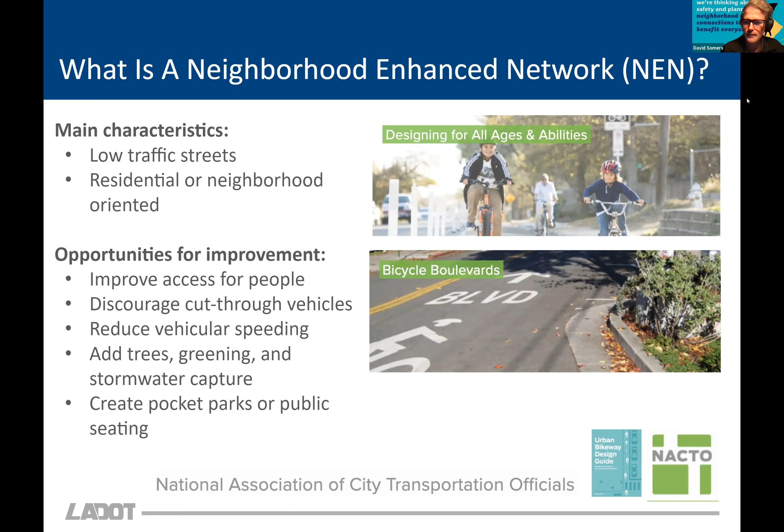Now, to get to know our attendees a little better, we're going to administer a quick poll. The question is, how comfortable are you riding a bicycle to get to places? The range of options there is: bicycling is not for me, not interested; I would like to bike but I have concerns; I ride a bicycle but only where and when I feel safe; and I ride my bicycle without fear anywhere and everywhere. So just give that a minute for those on the call to complete.

All right, we will share results. The results are that most folks on the call ride a bike, but only where and when they feel safe. At least one respondent said, I ride my bicycle everywhere without fear, which is pretty interesting. It's good to know where those on the call are on the spectrum of bicycle riding comfort, especially in Los Angeles, where we have high traffic urban streets.

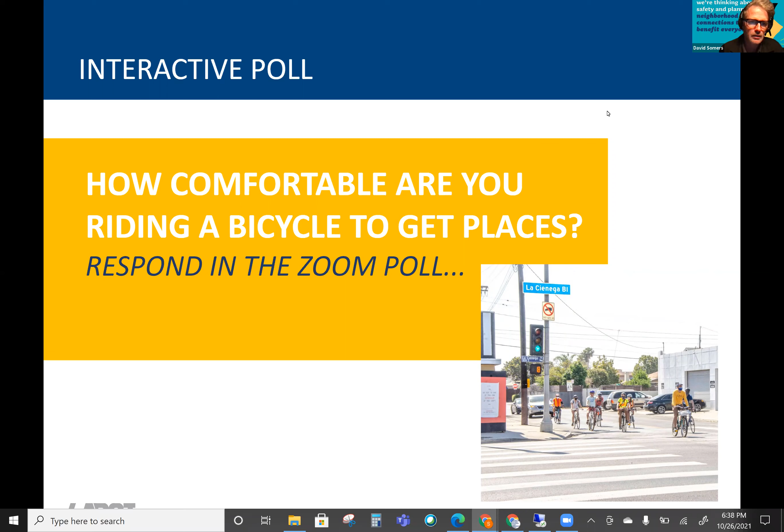And just to ground this result into a larger perspective, a national survey of 3,000 people from 50 large metro areas suggests that over 50% of the population would like to bike more but have some reservations. This is what we typically call the interested but concerned category of folks who would want to bike, but the conditions aren't available to feel comfortable doing so. People regularly say that travel stress, the experience of riding with traffic, is a major concern in choosing to bike.

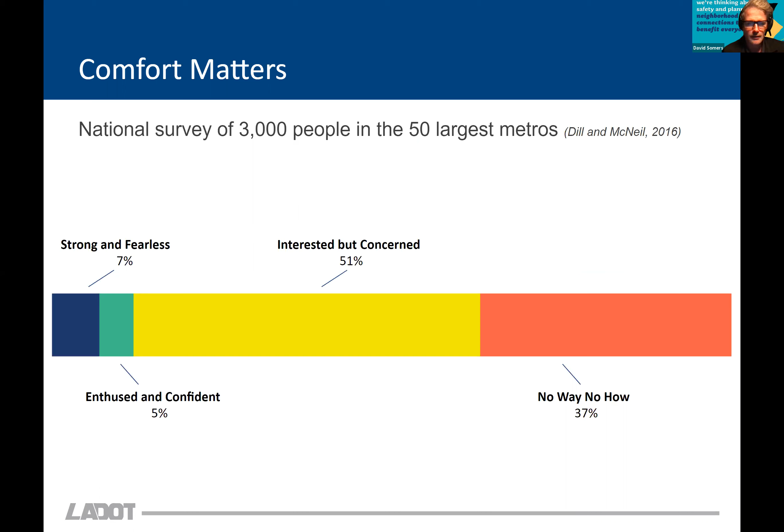And in an LADOT survey of over 800 people, we found that 88% of respondents agreed with the statement that they would like to bike more if it were safe, pleasant, and convenient. So this is really the grounding under which we understand the exercises that we undertake in terms of understanding travel stress and how far we need to go in order to make it more comfortable.

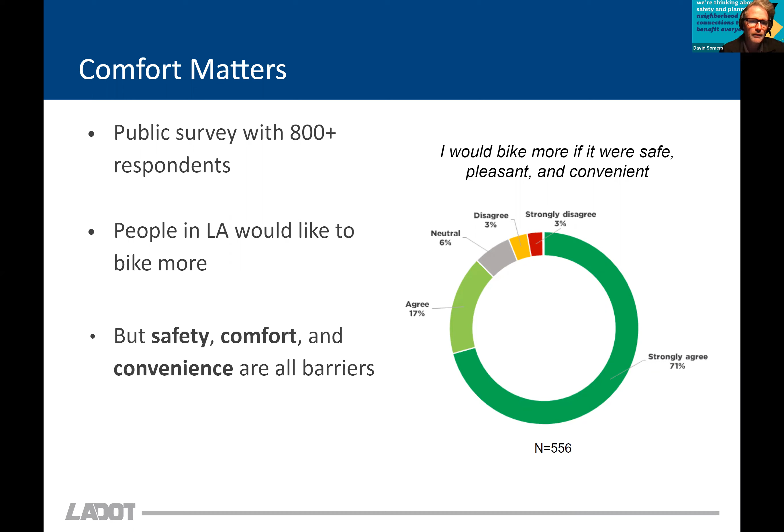If we go to the next slide. If we're to achieve the mobility plan goals of better access for Angelenos and fulfill LA's climate goals of the city's Green New Deal, we will need to expand opportunities for people of all ages to make trips by biking and walking. We can achieve this goal by reducing travel stress.

LADOT measured travel stress on our neighborhood network through criteria like traffic and speeding, and how safe or unsafe people feel when crossing major streets.

Our assessment found that the main challenge is intersections, where neighborhood streets cross larger major streets. There's a lack of traffic signals to help people cross major streets on foot or on bike. You could see this where the intersections have red circles scored as high travel stress, where there are no formal crosswalks or signals.

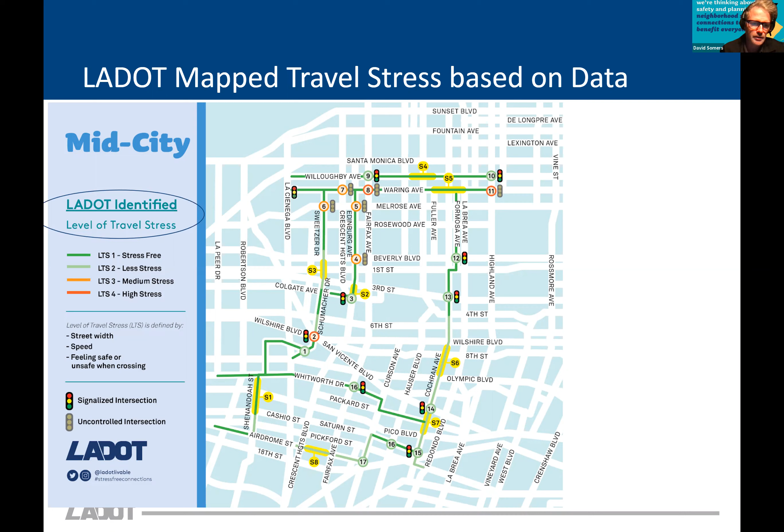So this is essentially us understanding travel stress on our neighborhood network and what we need to do in order to make continual corridors that are safe and comfortable from origin to destination for folks, especially here that we're focused in mid-city. So the next slide is that.

So what you were seeing is LADOT's data-driven approach on the previous slide, where we compiled the data about traffic and speeding and the conditions at an intersection. To validate our data, we recruited participants to help share their travel stress levels with us.

Some of you participated in this, and your assessment largely agreed with our findings that intersections that lack crossings were key barriers. You also selected a few street segments as having higher travel stress due to traffic or speeding or other conditions that made it uncomfortable to ride amongst traffic. This indicates to us that we need more traffic calming at these streets to be comfortable for all abilities.

LADOT is very grateful to those individuals and organizations that helped validate our analysis and have a better understanding of travel stress barriers. I would indicate that there was one intersection that we also focused on that was a little off our network, but one of our participants identified having specific challenges crossing the street and accessing transit there in Little Ethiopia.

And so we wanted to acknowledge that as well as part of the feedback, which was valuable to us. And we are looking into how to address those concerns with some of our other programs at LADOT.

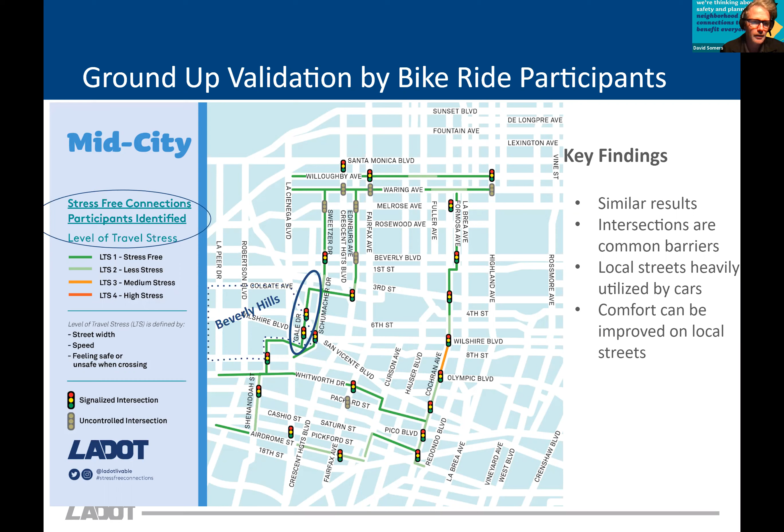So that's just to say that the feedback we've received from this exercise is already resulting in real changes, and we look forward to making more of those as we get further into our planning process. So the next slide - now that we've identified barriers, the next step is to look at design solutions.

And I will now pass it over to Severin to talk through what are some of the tools that we have available to us to address the barriers to travel stress.

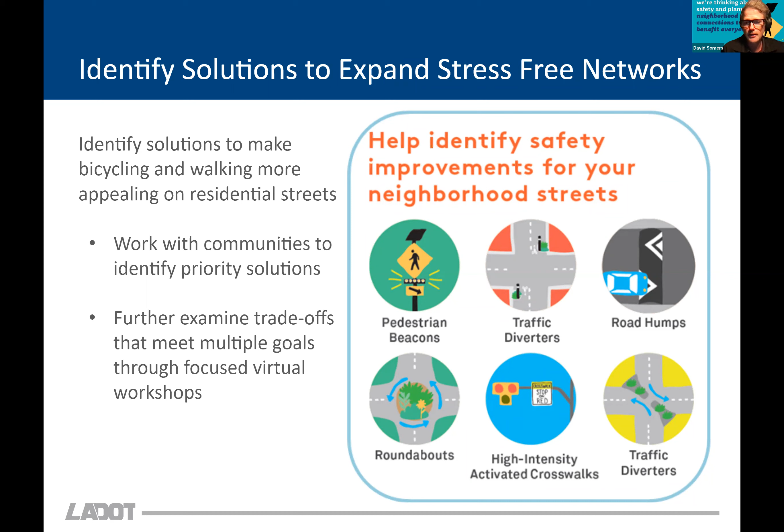So we want to take our technical data and the user feedback that we've acquired so far, and use this feedback to identify tools that we can use to create these low stress neighborhood corridors. Some of these tools you might be familiar with, but others perhaps not so much. So I'll quickly run through some of the things we're considering currently at the moment, so you have a better idea of what we mean when we say we want to build out low stress neighborhood corridors.

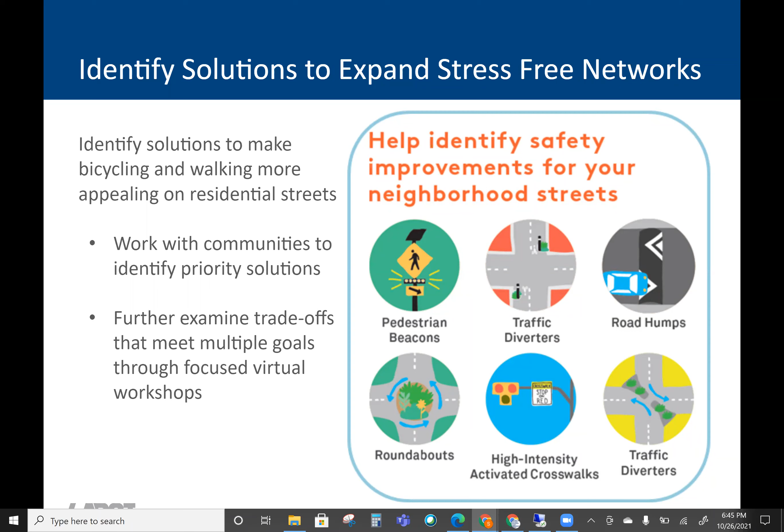Perhaps one of the most obvious tools in the toolbox is the speed hump. Essentially it's raised pavement in the middle of a street on a residential street, used to slow traffic down. Sometimes it can be combined with crossing opportunities so that cars slow down when somebody's crossing at a designated crossing. This is a fairly familiar tool that we see throughout the city on neighborhood streets.

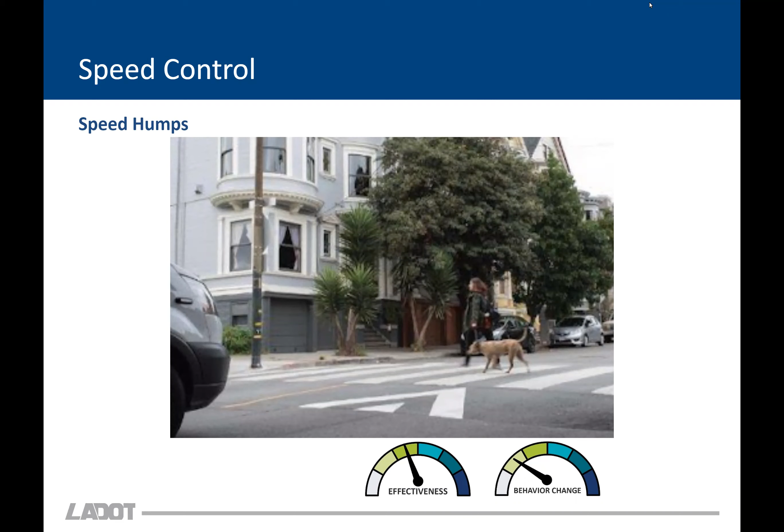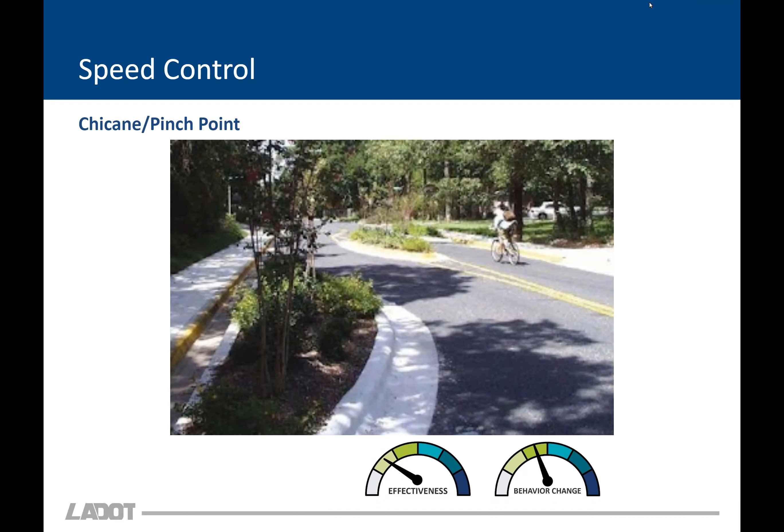There's something called chicanes, and as shown in the visual, it's landscaping and hard elements that force traffic to actively navigate around these elements so that they're more aware of their surroundings and not just coasting on autopilot driving down a straight street. It does require a bit more attention, so you can't be fiddling with your phone. This serves to slow down traffic and offers opportunities to incorporate some modest landscaping.

Then there's curb extensions. We also see this a fair amount in the city. This shortens the pedestrian crossing at intersections, and requires traffic to slow down as they navigate turns, particularly right turns and left turns. But as far as their effectiveness in slowing down traffic on a straightaway, it may not be as effective as some of these other tools.

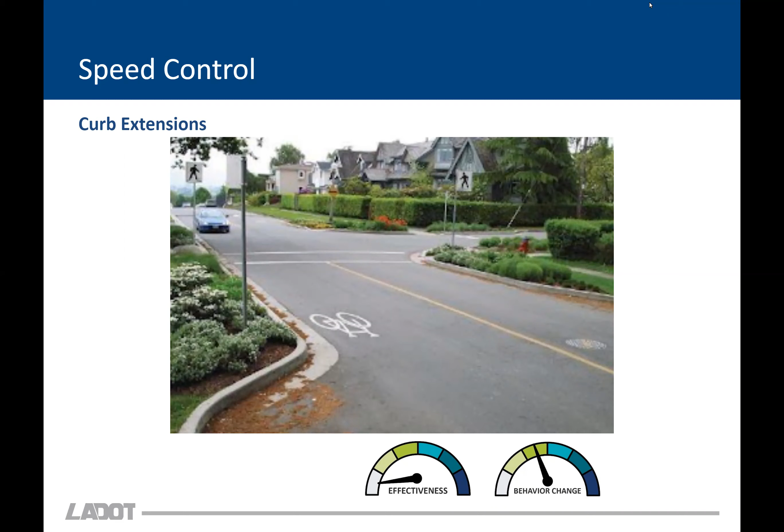There's traffic circles. We are starting to see these crop up around the city, and essentially this forces traffic to navigate in a counterclockwise motion around the intersection whether they want to make a right turn, a left turn, or just go straight ahead. This eliminates conflicts between different directions, so you're less likely to have head-on collisions or T-bones where two opposite streams meet, because everybody is navigating around a common space. The opportunities for conflict are minimized, and it raises the awareness of everybody traveling so that you're actively looking and navigating space visually.

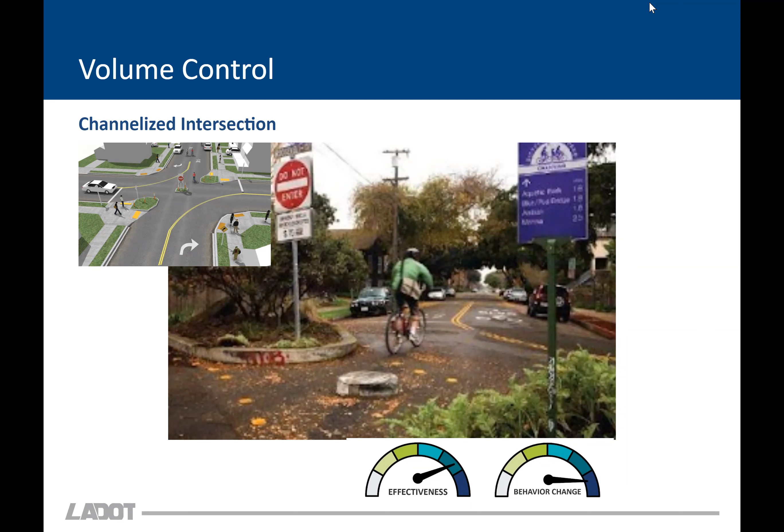There's something we're calling channelized intersections. What this does is require traffic to turn in just a single uniform direction, though it does maintain through access for people walking and biking, as well as emergency vehicles. This is a tool that can be strategically placed so that traffic doesn't immediately come in from a major street and use a residential street as a cut-through corridor, but instead routes traffic back onto a main street.

There's another tool called a median island, and what this does is limit through movement, but it still allows traffic to turn right in and right out of a residential street. It also maintains through traffic on the perpendicular street.

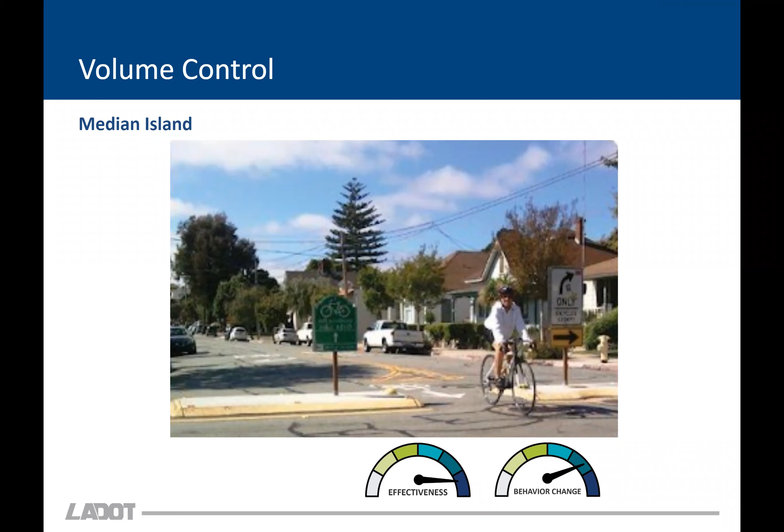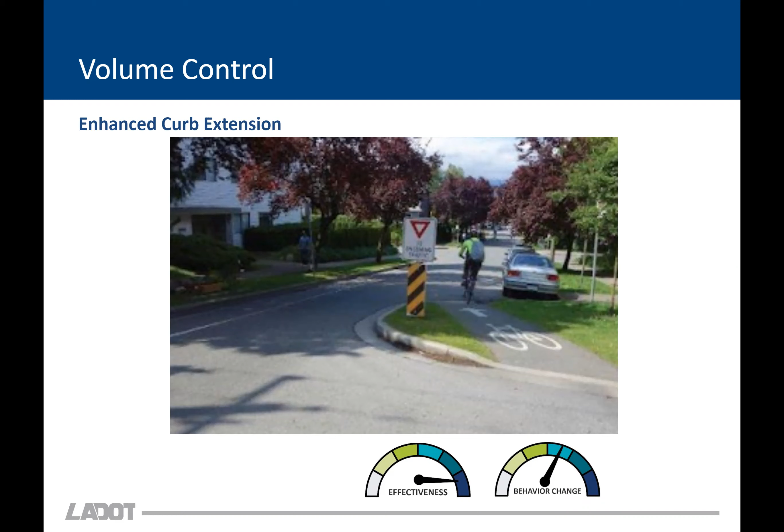There's something called enhanced curb extensions, and this is a curb extension that's much more substantial than your typical 3-foot or 5-foot curb extension that we showed earlier. These extend quite a bit into the roadway and physically limit traffic from entering a residential street. You're still allowed to exit on the street as shown in this visual, or it can be the opposite, only allowing traffic to enter but not to exit. It does maintain through access for walking and biking as well.

For a lot of these measures, like the traffic circles, median islands, or channelized intersections, these are things we can do using temporary materials, striping, plastic bollards and signs as a way of testing the measures to see if they're appropriate or working well, without necessarily committing to an outcome.

This, of course, can be less effective. We sometimes see that doing things with temporary measures has less compliance. People might drive over the plastic bollards or try to navigate around them. But nonetheless, it can be a good starting point as a proof of concept, or to better understand through temporary materials what a final outcome could look like.

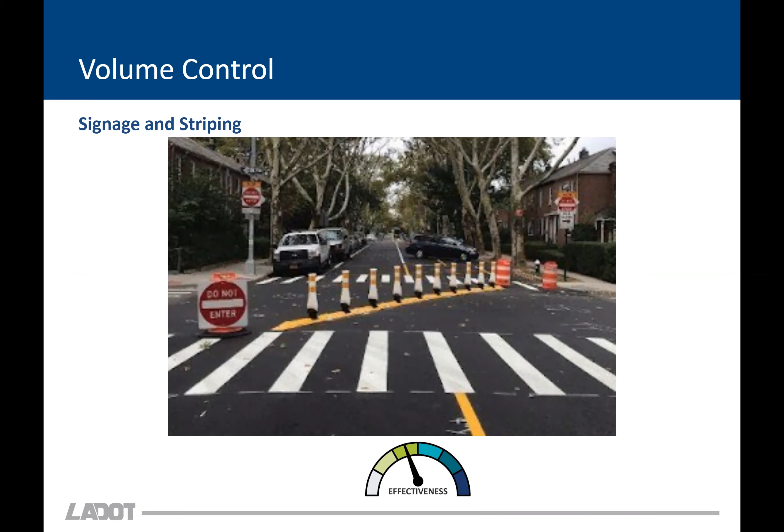There are also things we can do to our existing infrastructure, just modest tweaks to make our neighborhood streets more accessible for walking and biking. What we see here is an existing intersection that is slightly offset. What we can do is tweak the signal phasing so that in phase 1, traffic on the major street has a dedicated light and can turn in any direction they please. Then when they get a red light, we provide a green light to just one of the directions on the local street.

And this is done so that we can have continuous through movement on the local street and not have to worry about oncoming traffic. And then we can do the same for the opposite direction on the local street to facilitate that movement in a seamless motion, so that if you're riding a bicycle, you're not necessarily stranded in the middle when traffic has the green light on the major street. This is a way to separate those movements, and it doesn't require anything new if there's an existing signal. It's just something we can modify for that benefit.

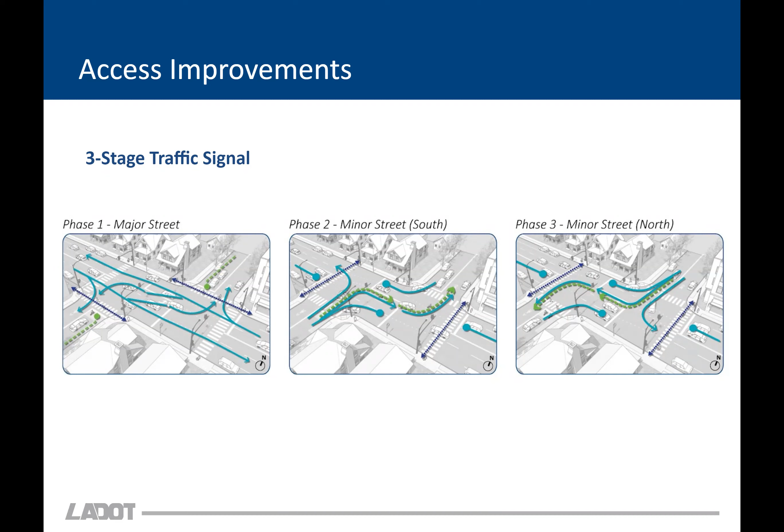And then there's something called a leading pedestrian interval, or sometimes a pedestrian head start. You may have seen these. What this does is provide a green light for people walking a few seconds in advance of vehicle traffic getting a green light. This is beneficial because pedestrians simply move slower than cars. An intersection a car can clear in 3 seconds might take 15 seconds for a pedestrian. By giving pedestrians that head start, they can get into the intersection and become more visible, so a driver turning right isn't suddenly caught off guard by a pedestrian stepping off the curb. By that point, the pedestrian will have already made it several feet into the intersection, and we can avoid these kinds of potential conflicts.

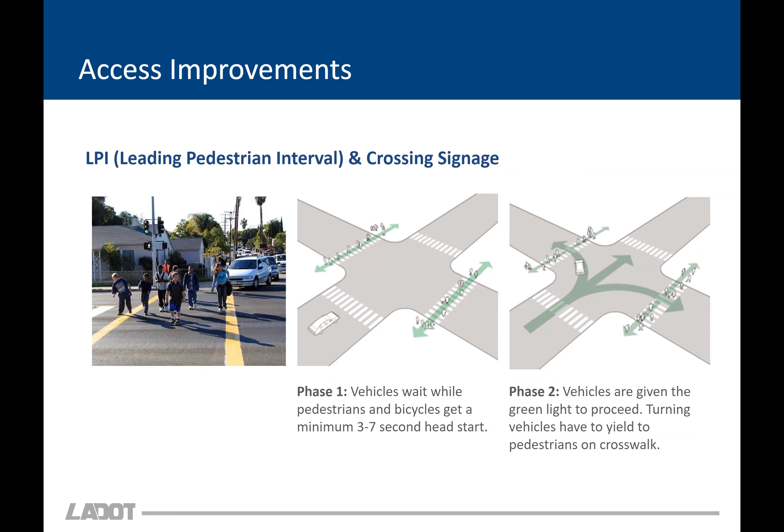So we take all these tools, and that's how we envision building a substantial portion of our stress-free networks. There are going to be some things that require traffic to slow down, and some elements where we may want to reduce the amount of traffic on a residential street, while providing additional accessibility measures to really prioritize sustainable transportation while maintaining local access, but discouraging unnecessary cut-through traffic.

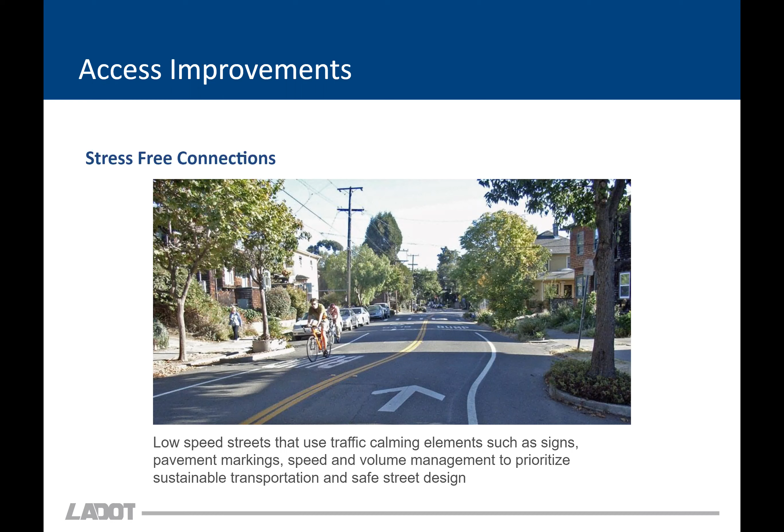All right, and now we have another poll, which we will share with you all. Please select your highest priority for designing neighborhood streets. There are 3 options presented here.

Everybody is taking the poll, and here are the results from the participants. We see that maximizing safety and comfort of people walking and riding bikes is very important, as well as reducing through traffic.

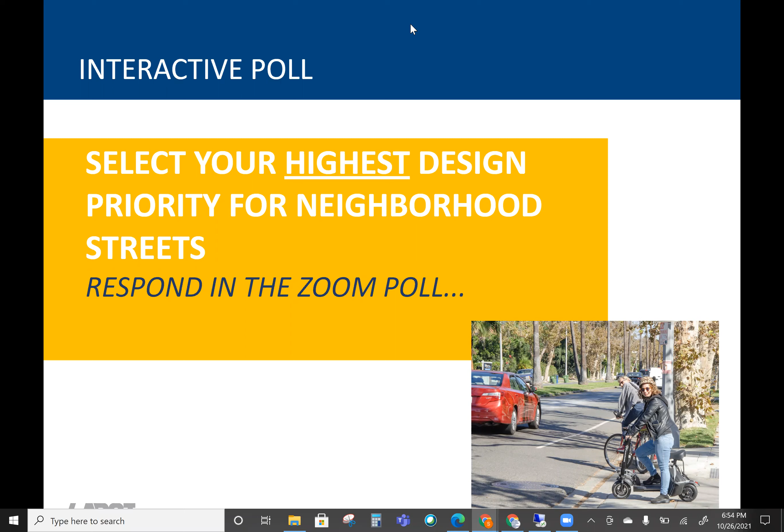Thank you. Now we have another question: please select your second highest priority. So we'll launch that.

All right, so the results are in, and we see that reducing through traffic in concert with maximizing safety for people walking and riding bikes emerge as the top 2 priorities. This is perhaps a good sign, because those are definitely key elements to building out that neighborhood network that is stress-free and really appealing to people of all ages and abilities. Thank you for participating in that.

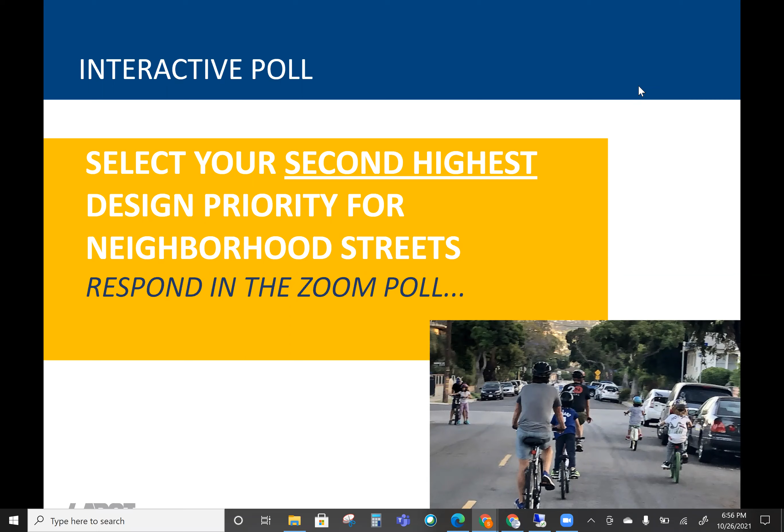So we've talked a little bit about some of the tools used on our residential streets. There is, of course, the issue which David mentioned a bit earlier, which is what we do at major intersections. So with that, I will pass it quickly over to David.

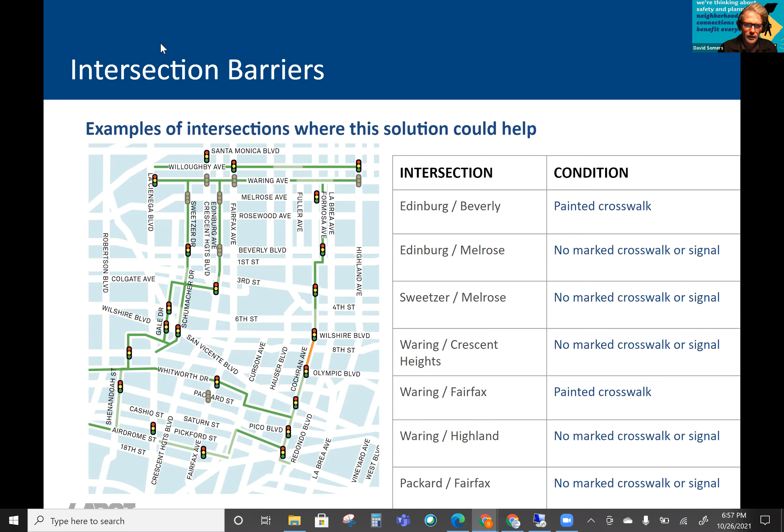These are examples - if you go to the next slide there, Severin - so I think this should be highlighted. Yes, so these are the intersections that we'll be further exploring in our planning process to design solutions that would help solve those gaps in the network and address user comfort and safety when crossing these major arterials. So I'm going to hand it back over to Severin.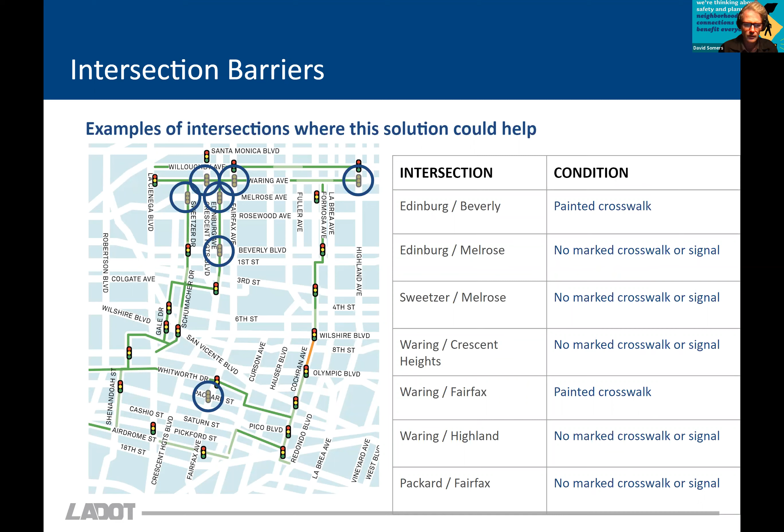To talk about what those types of intersection solutions would need to be in order to address some of those challenges that result in an uncontrolled crossing - where you're biking or walking, you come to a stop sign and there's no clear guidance on how to cross that street. Thank you, David. Yeah, so when it comes to crossing major streets, I think for a long time the only kind of solution we collectively envisioned was installing a traffic signal, right?

That's one way to stop traffic while providing access on the local street. But what we see is that sometimes this can invite more cut-through traffic on residential streets, because if you're driving and you know there's a residential street parallel to this busy street where you can trigger a green light and just proceed, that can be appealing for somebody looking to avoid traffic on a major street. The downside is that this makes the residential street less appealing for more environmentally friendly ways of getting around, where we want to make it appealing.

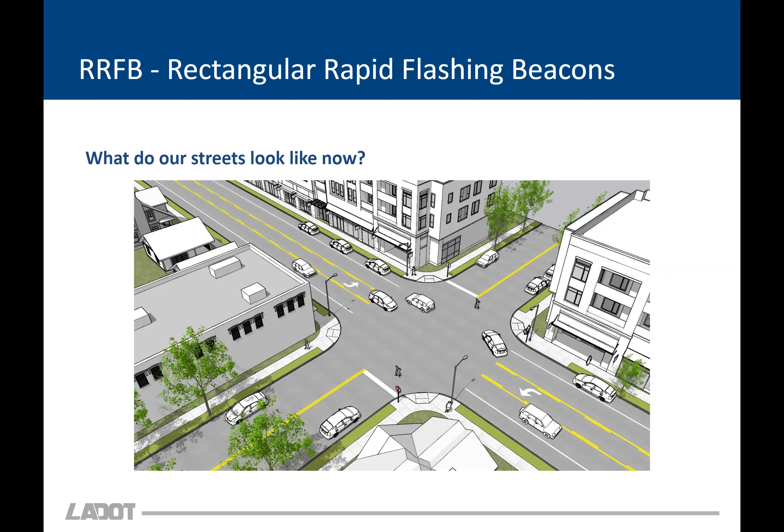One of the tools some of you may be familiar with is called a rectangular rapid flashing beacon, or simply flashing yellow lights, as I hear people refer to them. This provides a button for somebody walking or biking to push that activates flashing yellow lights and lets you get across the major street. This tool is typically used when you only have to cross one lane in each direction. It isn't really advised when you have to cross multiple lanes of traffic, so it has limited application, but here in this diagram is the kind of context where it might be an appropriate tool.

Should there be funding in place, this is always something that can be made more substantial and more aesthetically pleasing, incorporating landscaping, maybe a pedestrian island so that it breaks up the crossing. These aren't necessarily things that come standard with a flashing beacon, but it is something that can be considered.

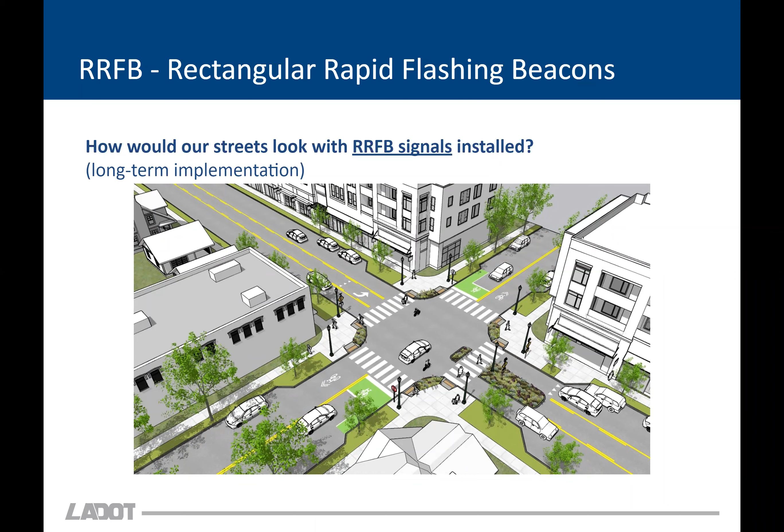But more often, when we need to cross busy streets, they look something like this. You have at least two lanes in each direction, and maybe there's a left turn lane. This can be quite challenging to cross as somebody walking or biking.

Now, this is a fairly new tool in the toolbox, but something we are looking to consider is called a pedestrian hybrid beacon. It effectively functions like a super stop sign. You push a button as somebody walking or biking, and it triggers a red light for traffic on the major street. This is different from a traditional traffic signal because it does not trigger a green light on that local street. So if you're on the local street driving, you're going to have a stop sign just as in the existing conditions. If you're looking to use this local street as your convenient cut-through, that isn't going to help you, because traffic is not going to be required to stop for you under any circumstance.

And then we see here what this can look like, again, if we have the resources and funding in place to make this more of a complete project.

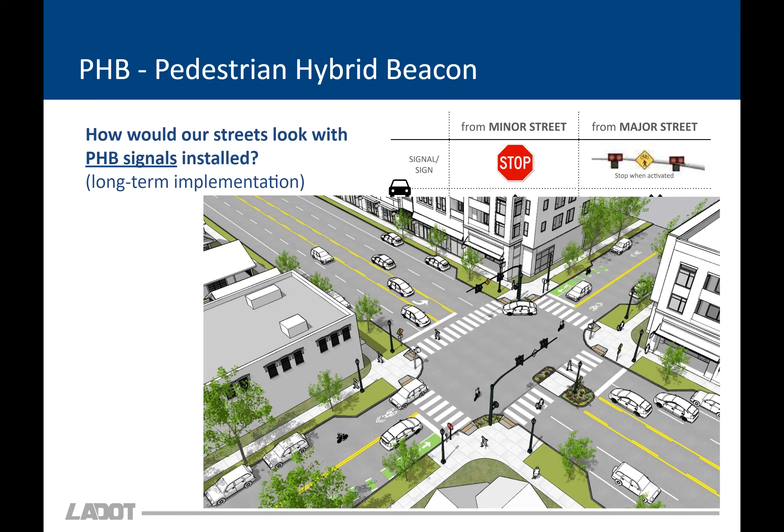And those aren't the only tools. We also have something called the Toucan, and this refers to the fact that two modes of travel can cross: people walking and biking.

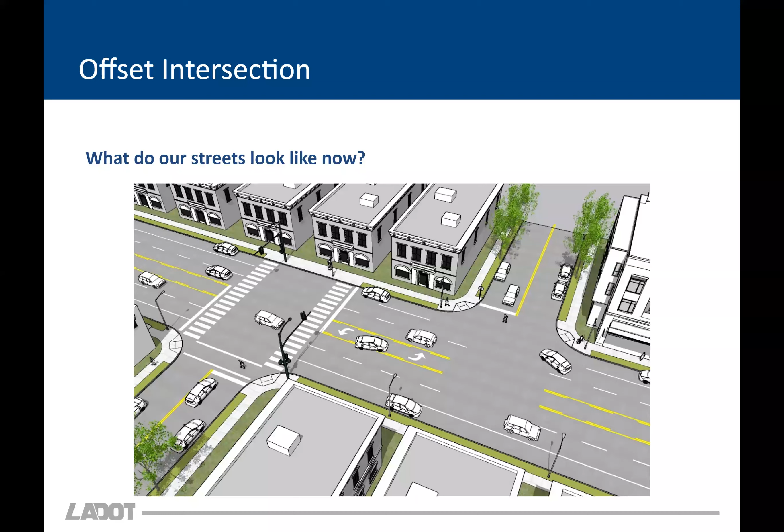This doesn't necessarily change anything in how cars are permitted to move, but it is a context-sensitive application of what we can do to change our existing infrastructure to make it more accessible.

And of course, if there is funding in place and the local context warrants it, we can think about more substantial changes, like adding an actual new traffic signal to the other side of the intersection, and providing accommodations to make a seamless transition—in this case a protected bike lane in either direction—so you can get through the intersection without being exposed to vehicle traffic.

It would require removing some parking, as would the prior option where we make use of existing tools or infrastructure. But this is all something that can be considered as a way of improving access on our local streets.

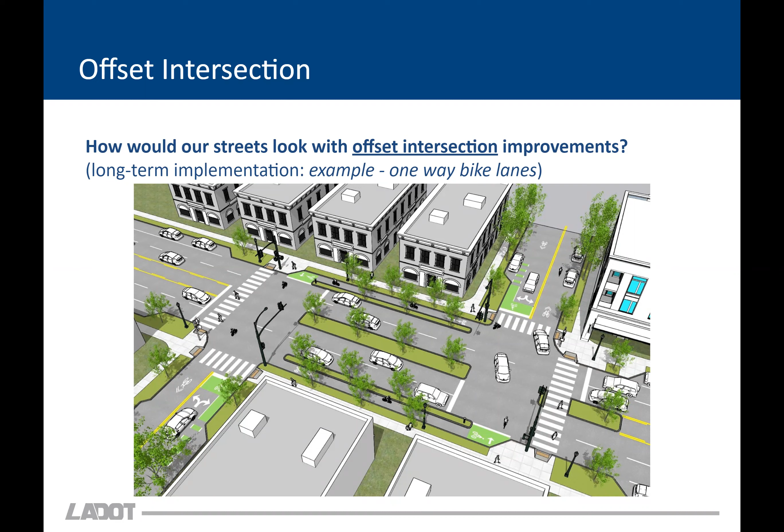And here's an example from Portland. All told, it can be a relatively minor change, but it can be a meaningful one in the way that people get around safely.

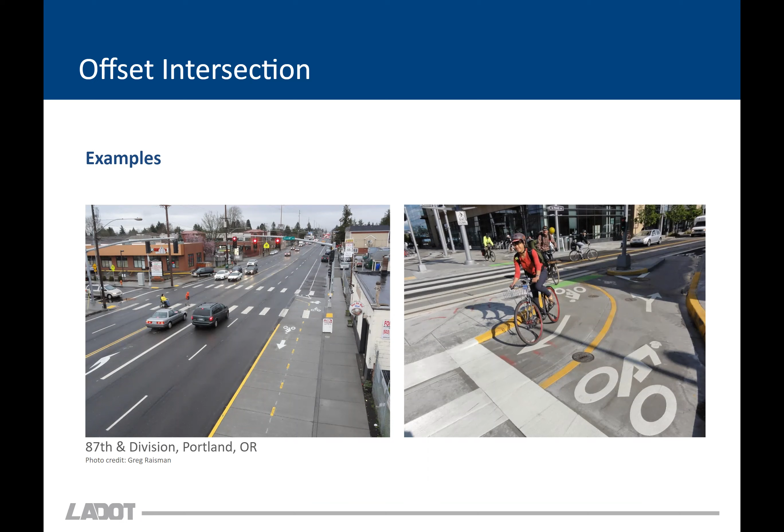So the question is, would you be willing to take a different way to travel or to drive to reduce cut-through traffic and make it more comfortable for more people to walk and bike on neighborhood streets?

The results are in, and we see that by and large, the participants in this webinar would in fact be willing to make some changes in order to facilitate a more comfortable setting for people to get around by walking and biking, or that it depends. Because if it's going to require a substantial rerouting or some other kind of change, maybe that's something that would require closer inspection to see if it merits the trade-offs in your perspective. So thank you for participating in that.

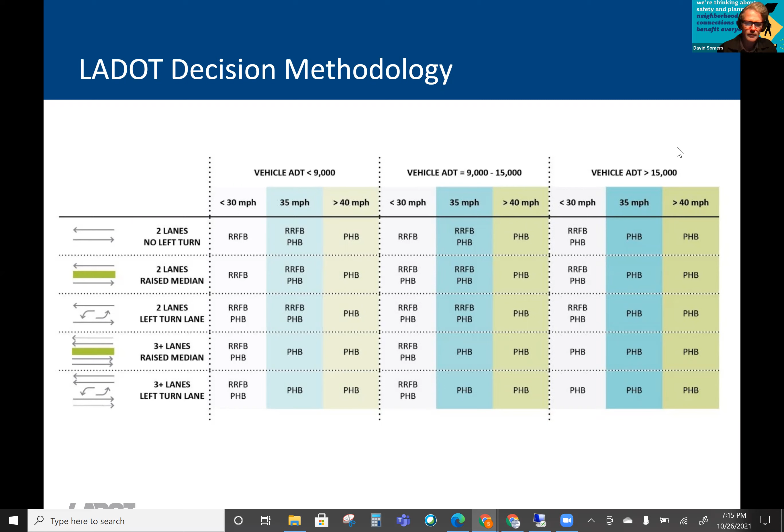Now we're going to move on and talk about the specific options available to us at the specific intersections. And so you'll see this diagram once again. This chart grounds us in the context of the Mid-City Neighborhood Network, where we show which intersection would meet LADOT's guidance for either an RRFB or PHB.

And almost all of the intersections along the network have characteristics that would disqualify an application for a rectangular rapid flashing beacon in and of itself. At a minimum, they would require a pedestrian hybrid beacon that better guarantees that stop control. And the intersection we talked about earlier at Packard and Fairfax, where there are specific challenges, is really the one that stands out as perhaps being eligible for being supported by a rectangular rapid flashing beacon. So I wanted to go over that to provide at least one dimension of the decision-making process of what we would be approved to site.

And we go to the next slide. We're going to get into these specific intersections in a little bit more detail, and those are those intersection crossing points highlighted in the graphic there. We'll be going over those that are along the network one by one.

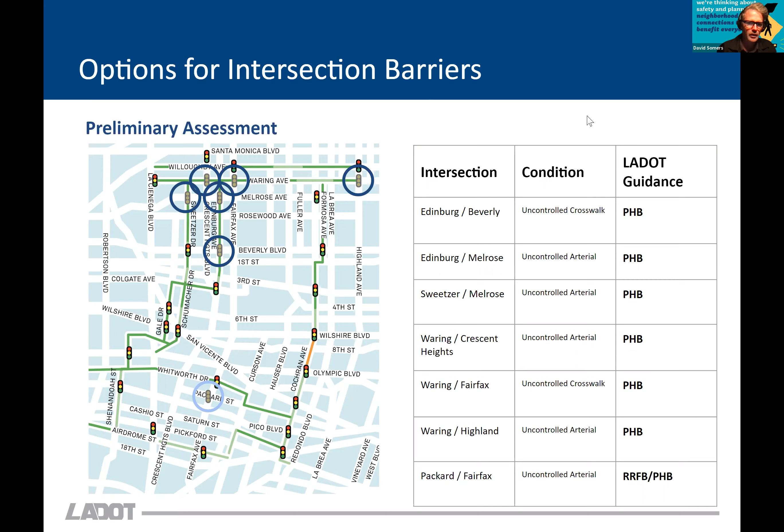We'll be talking through these design decisions for each intersection and some of the choices that we have available there. At this point, we're going to try to get a little bit more interactive on this section of the webinar. If you go to the next slide, we're going to start talking about the specific characteristics at a glance of these individual intersections, and we have our team available here at MIG.

What we ask you to do is, if you have specific feedback that you want LADOT to know about in advance of making this kind of determination of what kind of device to apply, the level of access that would be maintained at an intersection, we'd ask you to provide that in the Q&A, and we're going to enter that as a sticky note in a mural.

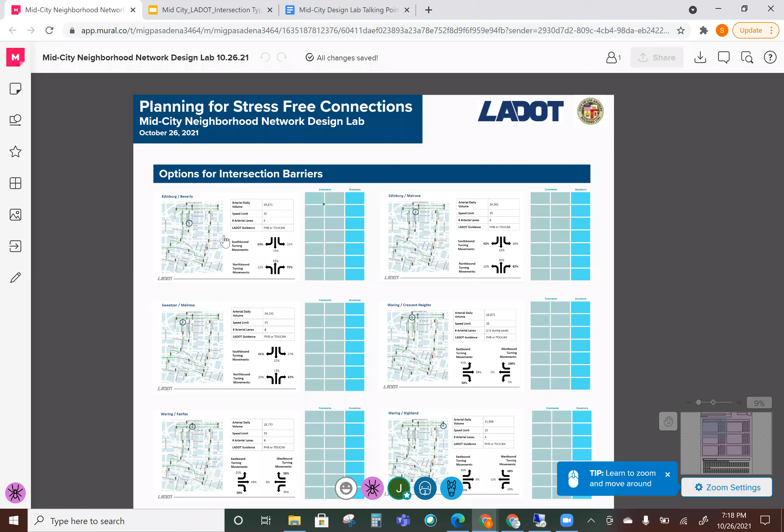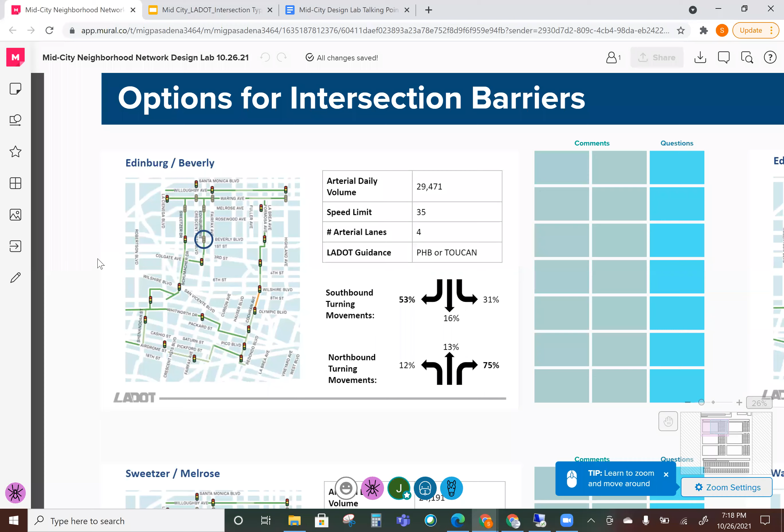Good evening, my name is Saray, and I'm actually in a neighborhood council, which is how I frequently hear about these events. I actually just asked the question in the chat. I didn't know that you were going to unmute me, but it was a basic question about, is this correspondence particularly for Mid-City, or are you guys taking recommendations for other streets?

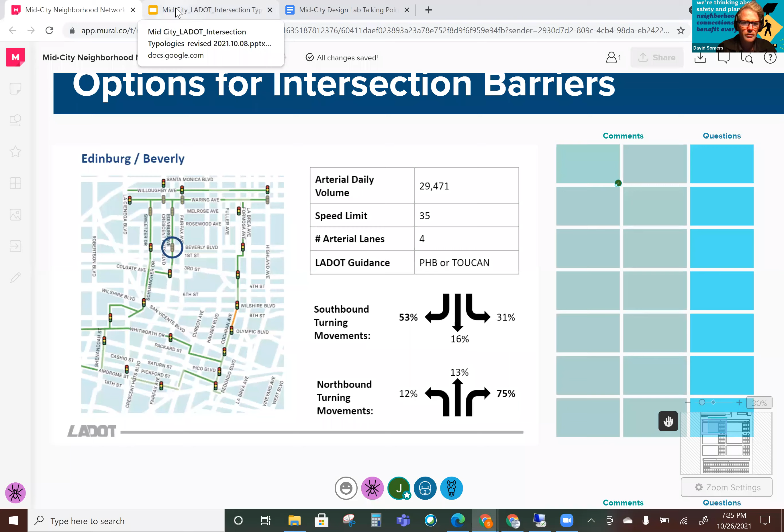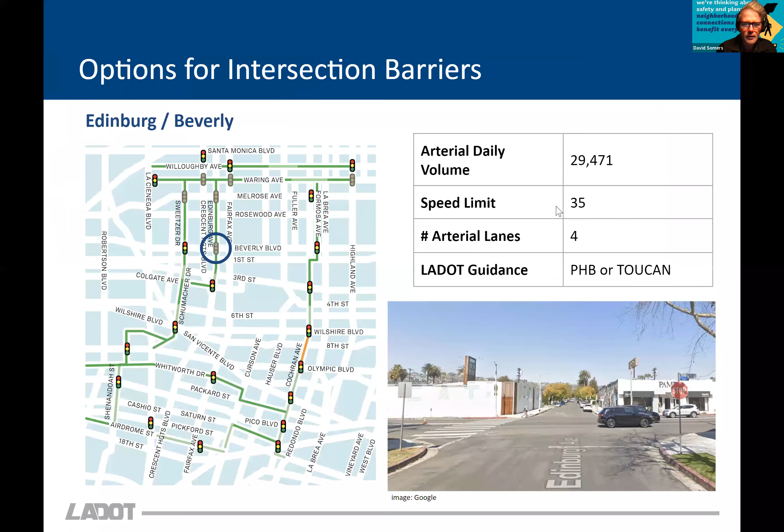Severin, could we go back to the presentation, the next intersection, also on Edinburg. Edinburg and Melrose.

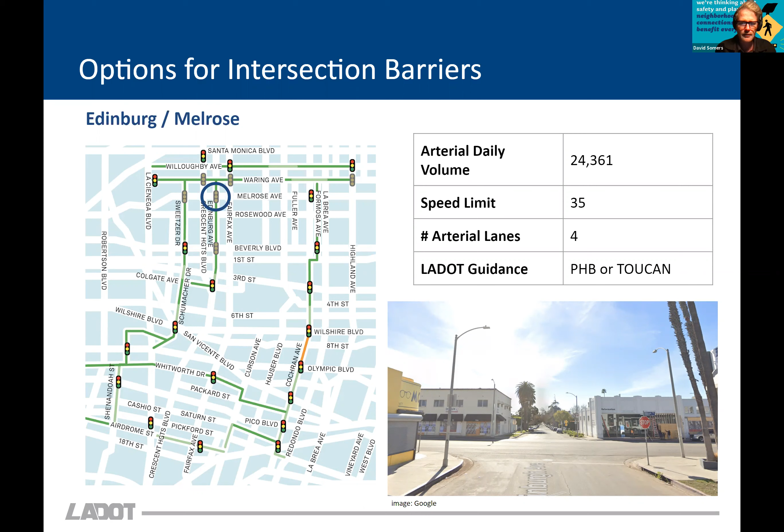So here you have the intersection at Melrose and Edinburg. This is just a photo off Street View of what that intersection looks like, for those familiar with navigating this street. If you go to the next slide, you look at the intersection movements. There are also dominantly right turns, but you do have some level of movement going straight through the intersection and a little bit more left. If we're restricting those movements through the use of a Toucan, presumably people would reroute to another location.

So we're going to start going to the Q&A here. Oren has indicated he's most interested in Packard and Fairfax. If time permits, we could certainly talk about that. If we can get through the discussions on the other six intersections, we can preserve some time for that. That comment seems to be seconded by Nikki.

Julia asked a question: should we be thinking about cost as we're weighing in on these options? If there's unlimited budget, maybe we should be implementing the safest design treatment. At this stage, it's good to highlight we'll get into this a little bit later, but there is not a defined budget for construction yet, because this is really at the planning stage of this process. Once we've identified our needs, we would pursue likely grant applications that would cover the cost of the solutions we're looking at. I don't have an estimate off the top of my head for the difference between, say, a PHB or a Toucan treatment. I think it's safe to conclude that anything eligible for an RRFB is substantially less cost than something like a pedestrian hybrid beacon, which is more or less like a signal in terms of operational characteristics. But we might be able to get more information there from those on the call.

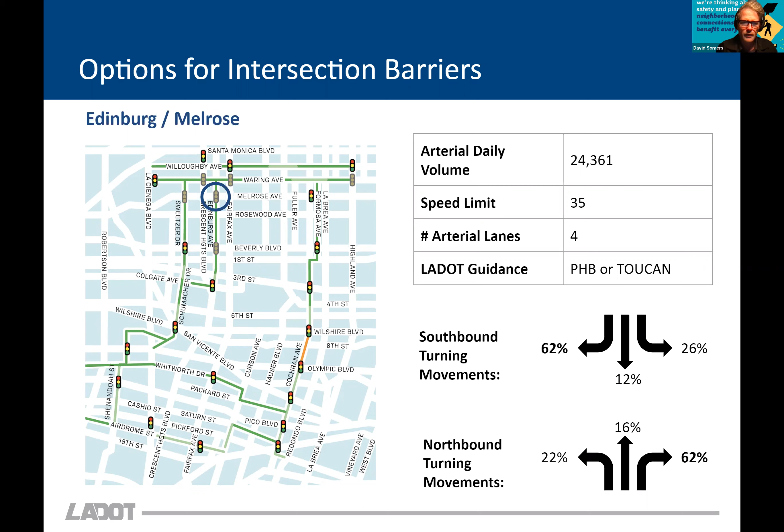So if there isn't any specific feedback on the intersections, we'll just be going to the next location. And that is this one at Sweetzer and Melrose.

So similarly here, that's just a depiction of what this intersection looks like. If you're familiar with this location, we'll go to the next slide which will show us the turn movement diagram. And here, once again, you see the large majority of turn movements are already taking that right turn.

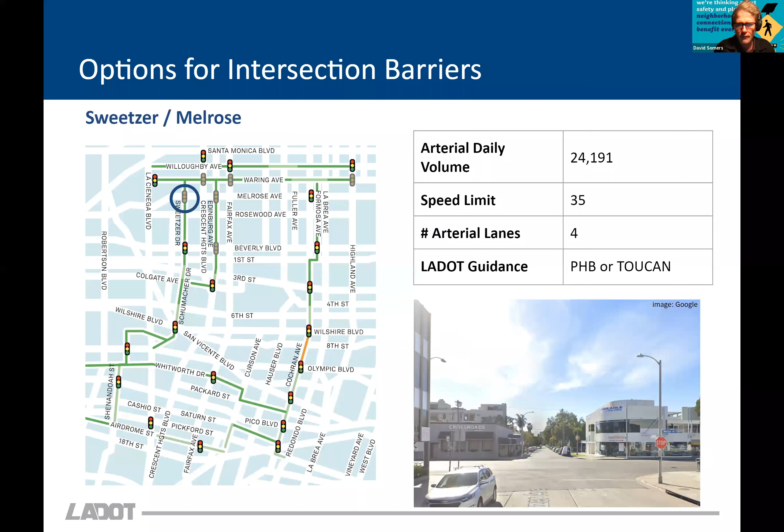Actually, go back one slide. Okay, so this wasn't one of the ones that already has turn restrictions. We'll get to one of those. So yeah, you already see a dominance of right turn movements at this location.

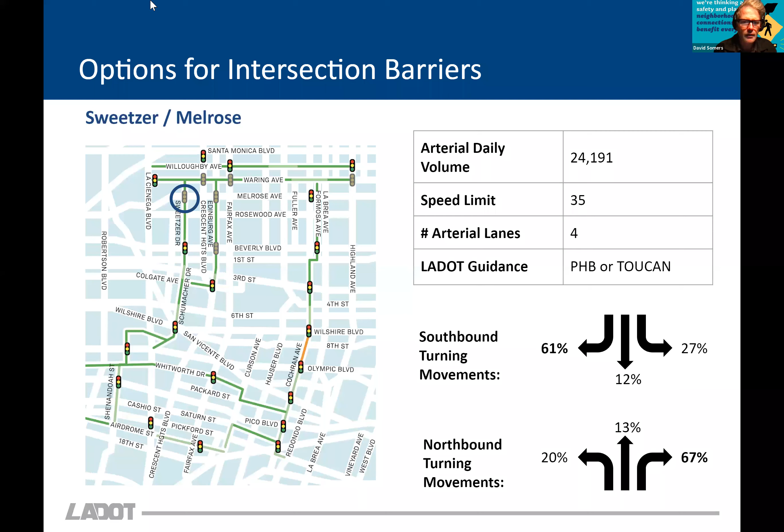And if there's any specific considerations on this intersection, we can walk through what those may be, at least collect your feedback. And if not, we can move on to the next intersection. I think that is going to be one up on Crescent Heights and Waring.

This is an interesting intersection because you may note in the photo, you already have guidance, a sign that says right turn only. And so if all we are doing is just formalizing what is already the existing rule, then a toucan operationally would not really change the baseline expected behavior.

But you do see within the diagram here that that's not necessarily complied with. It is in the westbound movement, but it appears that in the eastbound movement there may be up to 50% of people that are still making through and left turn movements there. So ultimately, the result of placing a toucan there would essentially be compelling more compliance to the existing expected behavior.

I'll answer the question in the chat: can you remind us what PHBs and toucans look like, or share a link to the part of the presentation where you show them? Yeah, I think as I walk through this, we can answer that in the chat. Probably the best.

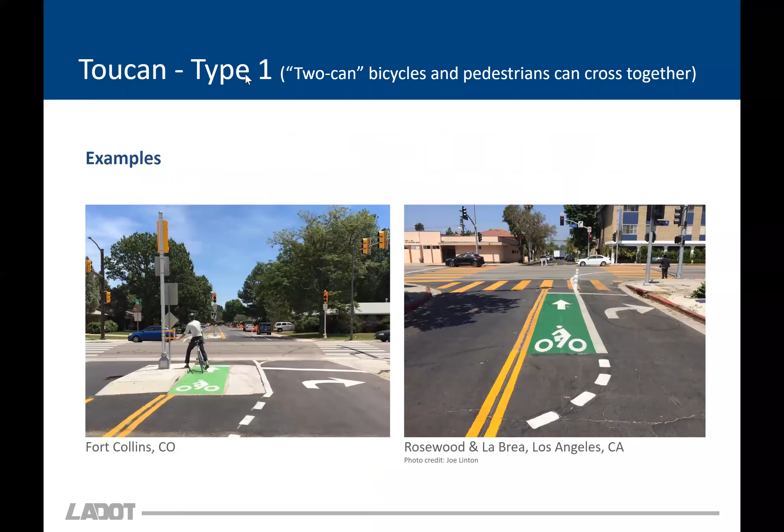So there were two different kinds of toucans: one which limited vehicle traffic on the local street to turning right, but still allowed traffic on the major street to access the local street. The alternative configuration was where traffic on the local street can turn left or right onto the major street, but nobody can turn onto the local street—traffic on the major street can't make left turns or right turns onto that local street, they can only continue through the intersection. So those were the two kinds of toucans.

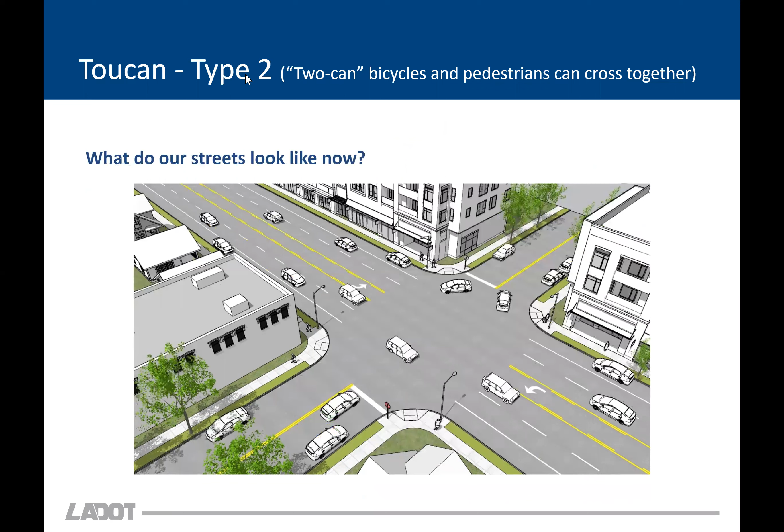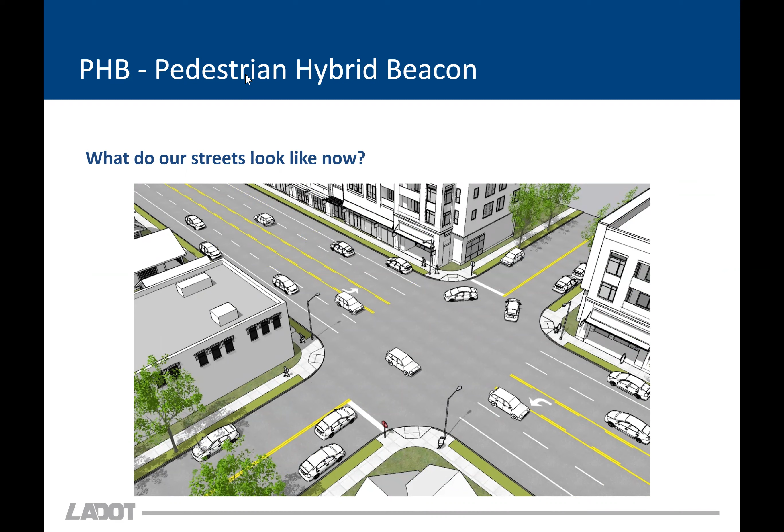And then the hybrid beacon doesn't change anything about how the intersection operates for cars. If the existing condition today is just a stop sign and you have to judge your movement by a gap in traffic, that's still the case with the pedestrian hybrid beacon. What's different is that people walking and biking are able to use a push-activated button to trigger a flashing red for traffic on the major street.

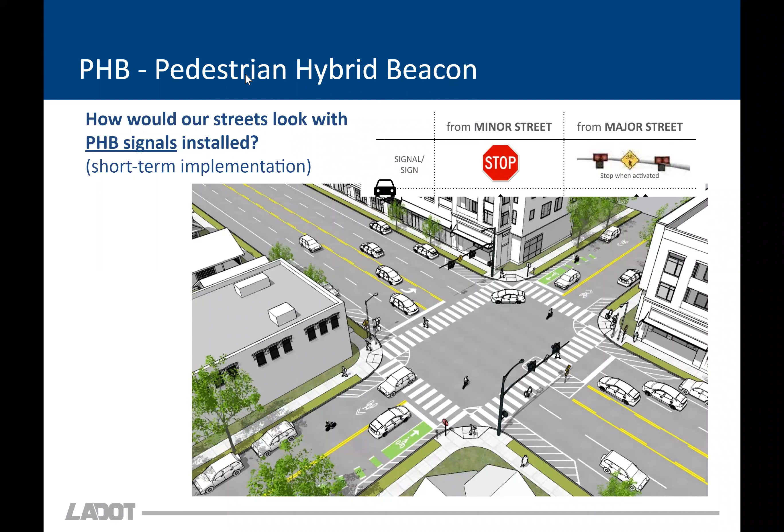Were there any questions or clarifying comments we can make on that front? It looks like Julia's raised her hand, Severin. So maybe we can unmute. Yeah, and we'll elaborate a little bit.

Great, thank you so much for doing this. This is a wonderful presentation so far. And thanks for going back to these definitions.

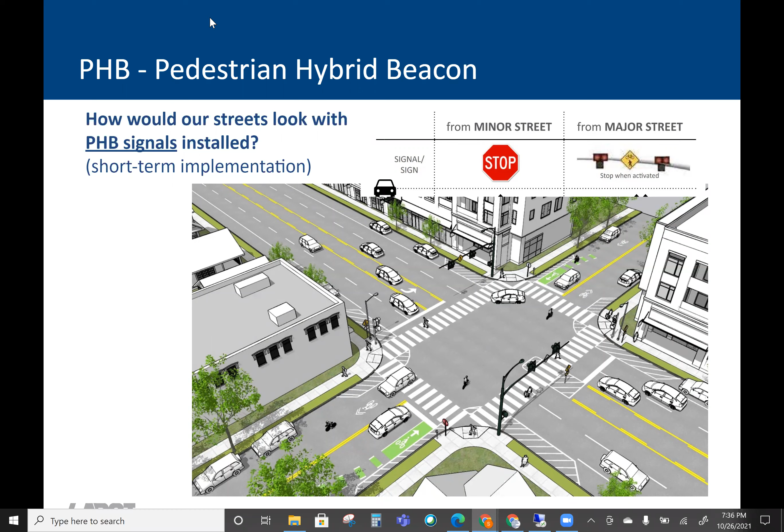As a cyclist and somebody who walks a lot in mid-city, the pedestrian hybrid beacons I've experienced in LA seem to work better when cars are already going slower on neighborhood streets with lower traffic. It can be scary as a cyclist or pedestrian to head into the intersection with just flashing lights or stop signs, because so many cars run those or don't respect them. So the Toucan Type 2 seems like maybe a better approach for some of the faster intersections you had shown previously, David.

Sure, thank you, Julia. One clarification: the pedestrian hybrid beacon has a red ball like a stop light. Just to clarify, when you think about riding your bike in LA, is it the rapid flashing beacons at a crosswalk, or the pedestrian hybrid beacon that Severin was showing before, that you were saying may not get as much compliance? It was the pedestrian hybrid beacon.

I'm thinking specifically of one not in mid-city, but in Hollywood - there's a pedestrian hybrid beacon in Thai Town, East Hollywood. I forget what the other intersection is. But yeah, it's the pedestrian hybrid beacon.

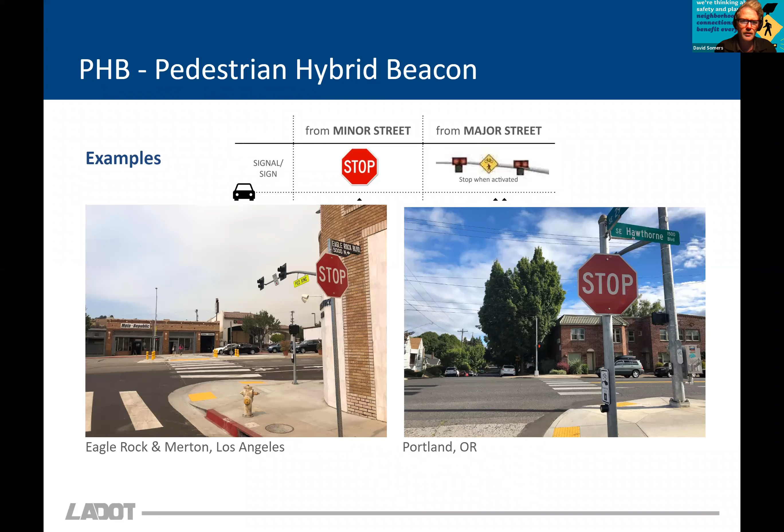Okay, excellent, thank you for clarifying, that's a helpful comment. So in your experience, a toucan would compel more people to stop and improve compliance. I'm not sure what the research shows off the top of my head, but the pedestrian hybrid beacon does have a pretty high compliance rate compared to the rapid flashing beacon - the rapid flashing beacon has about 80% compliance versus the pedestrian hybrid beacon in the high 90% range. So it is head and shoulders above that, but I can definitely understand the toucan having its advantages, especially considering the volumes and through movement we're looking at here.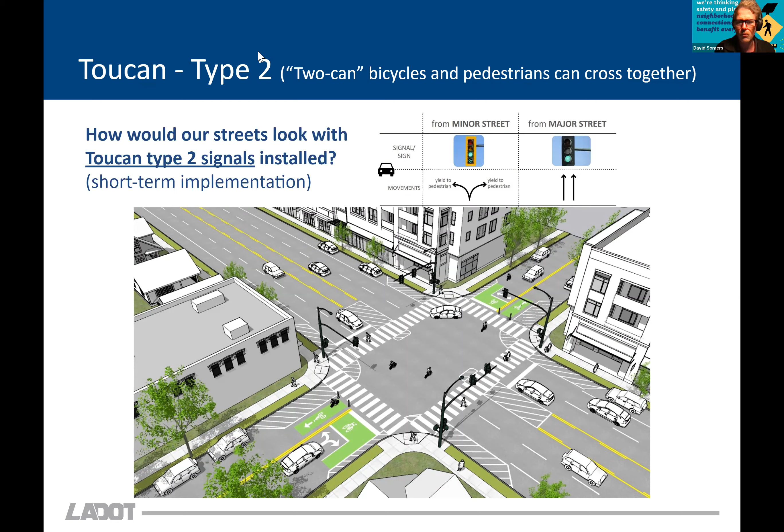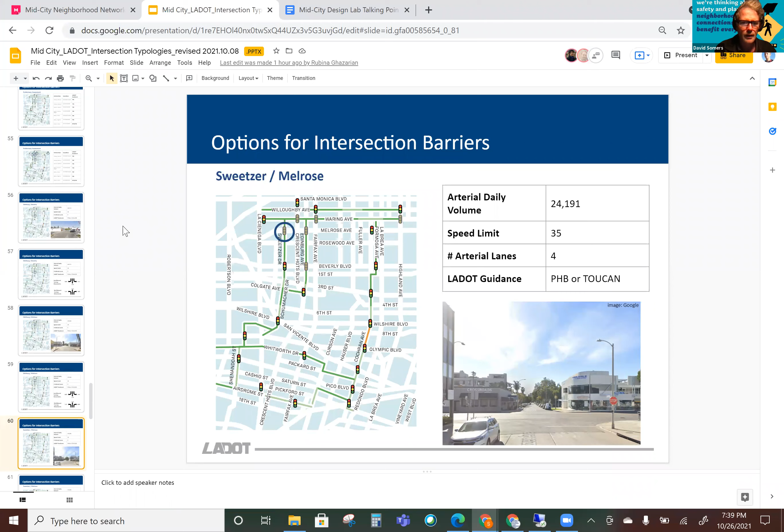Severin, if we can go back to the location we ended up at - I think we were talking about Waring and, what was the intersection there? Waring and Crescent Heights.

So if there's any specific feedback for this intersection at Waring and Crescent Heights - as I mentioned before, the toucan isn't really introducing a new regulation at this intersection, because you're already restricted from making through movements, at least per the regulatory signage there.

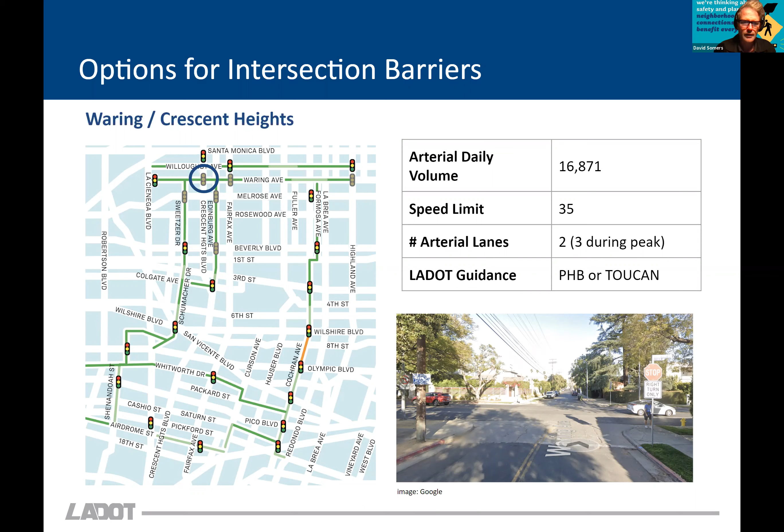If we go on, and if there is any specific feedback for that intersection - it looks like we do have some in the chat. Toucans would be great along Crescent Heights. West Hollywood implemented Sharrows on Romaine a couple years ago, but there isn't a way to cross Crescent Heights.

And I guess that's in Hollywood or West Hollywood. So thank you for the feedback - we're recording all these comments for posterity, so we appreciate it. That intersection is qualifying in LA. Thank you, we'll definitely consider that there is a preference there for the toucans.

Now moving on to Waring and Fairfax. This intersection is a little different than the others we've looked at. Currently, if you can make it out in the photo, there is a crosswalk at this location. There's a sign, but no other indication that drivers are expected to stop - you wouldn't even see a rapid flashing beacon there. In fact, a rapid flashing beacon, as we discussed in the guidance, wouldn't be approved by LADOT to site at this location.

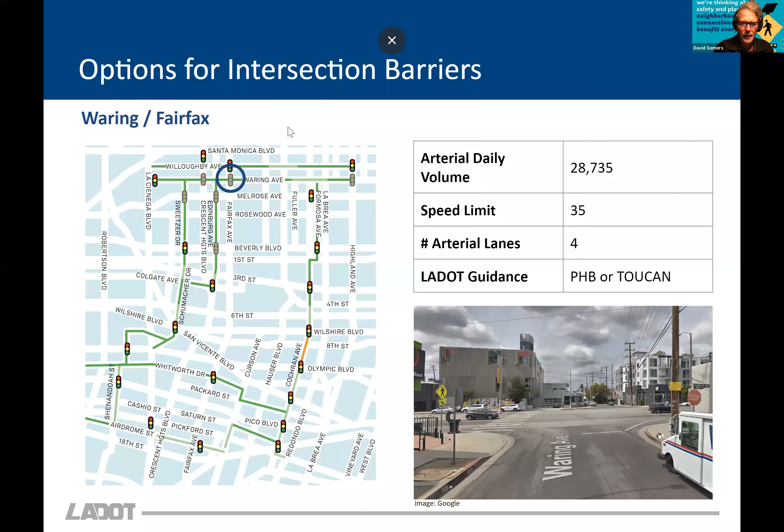So really the choices here, once again, are upgrading this location to a pedestrian hybrid beacon or implementing a toucan. If you go to the next slide, you see the turn movements at this intersection - similar to others, a higher degree of right turn volume and much lower through movements. There doesn't seem to be much advantage with just a stop sign to cross a fairly wide street like Fairfax.

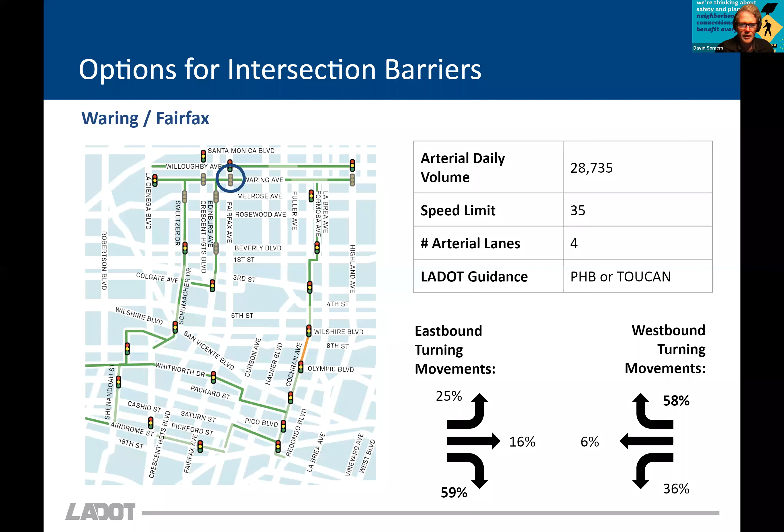So there are some left turn movements, so there would be expected to be a little bit of adjustment there. But we will certainly consider anything we need to capture. So on to the next intersection, if there are no further comments for this one.

And so this is the intersection at Waring and Highland. Again, similar to the intersection we saw before, the guidance, at least the behavior that's expected in accordance to the signage and the regulation, is that only right turns are permitted here.

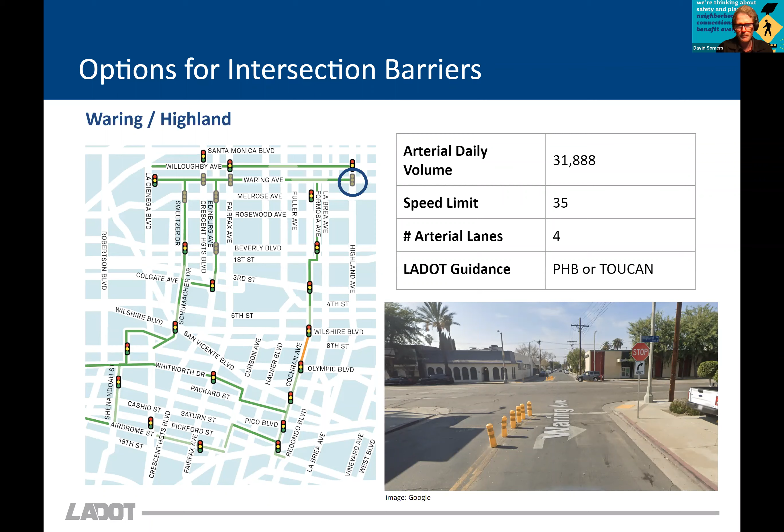And it's actually supported by those median bollards, so it's a little bit more reinforced by some type of treatment that's a little better than a sign. Once again, if we are upgrading this location as a Toucan, there's really no effective change in the expected operation of the street.

So I think we will pause if there's any comments or questions during this section. David, I also wanted to ask if Charlie Ho, who's joining from LADOT Active Transportation, would like to elaborate or provide any additional context. Charlie, please feel free to jump in.

Sure, if you'd like. Thanks, Rubina and David. I think David pretty much covered it all, so I just want to go back to the previous question regarding PHB and Toucan. I think, like David mentioned, PHB has a pretty high compliance rate as it is. I think the difference is sometimes it's a little bit unfamiliar to the drivers, and they're not expecting it, and sometimes that could result in a lower compliance rate.

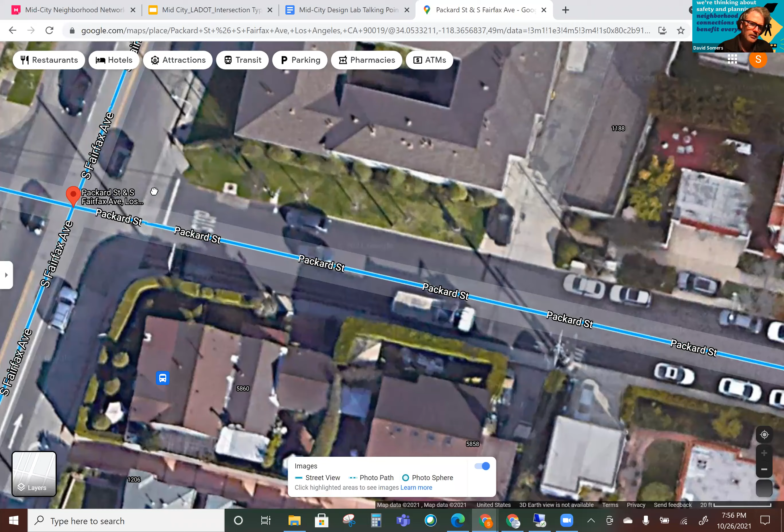It's a little more complex in terms of how we would bring this up to a more or less standard condition. If you go to the street view, just to look at it from the regular perspective—you see, there definitely is needs, no doubt. If you pivot to the left there, that's where you see you do have a sidewalk landing, but again, no sidewalk along that property frontage.

It's possible you may need a better landing there for a rapid flashing beacon. If you just kind of pivot to the left a little bit, yeah, and also with some storm drain utilities. So this would certainly require a little more investment working with another agency. I do think the venue for this may be good to continue championing within the Great Streets program, because that program has more interagency coordination.

I did consult again with the Vision Zero planner to make sure this was addressed in that exercise as well, so that at least it's documented as something that when we do look for funding in the future, that's a need that could be addressed in a future funding exercise.

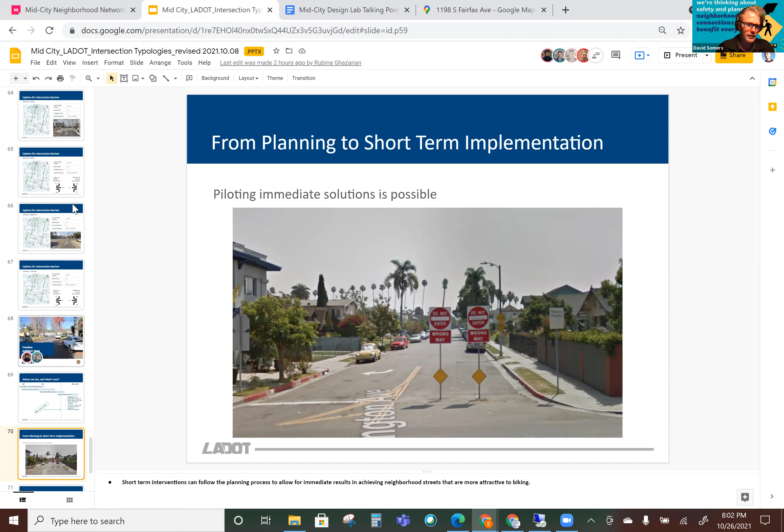This might be a good time to pivot back to where we are. Actually, that's a good transition at this point to talk about next steps, because ultimately, we're kind of in the same place as that. This is a planning process. We're identifying needs. You're helping us to focus our lens on what we need to look at in order to improve conditions of bicycling and walking. This is something that is certainly within that scope. So just to bring you up to speed of where we are in the bigger picture, if we go to the next slide.

We are currently hosting similar design lab sessions in the other focused areas that I mentioned earlier, in the Central LA and South LA and Watts areas. So this is the first one. Thank you all for participating.

When we conclude these discussions of design labs, we'll compile our analysis and the feedback we've collected to date into a report where we'll be presenting our findings to City Council. We may be making preliminary recommendations in corridors and design options to pursue, though final decisions on specific design outcomes will be made at a later time once we do have the funding procured to develop more detailed designs and are able to install, construct and install. So project implementation would be phased and could be phased.

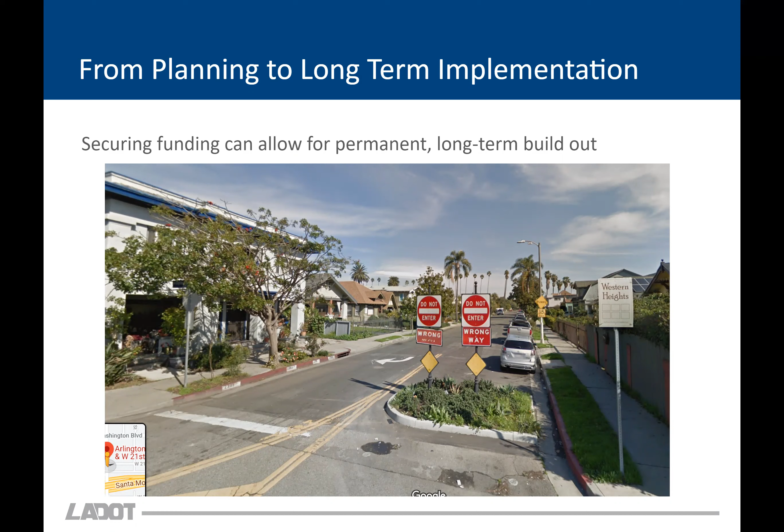Hi, yes, I just had a question about the quick build implementation. The improvements we've talked about so far have all been kind of big ticket items that, I don't know, maybe I don't have the right imagination, but it seems like it would be hard to pilot a pedestrian hybrid beacon or a Toucan. But a lot of the other interventions, like traffic circles and chicanes and things like that, we haven't really discussed. And those, I assume, are the things that are on the table when you're talking about quick build stuff. So are you also considering treatments at minor intersections or mid-block that we just didn't have time to talk about? Or are you really just focused on the major intersections?

Right, yeah, it's a good question. So the reason that we focused on major intersections is because largely that's where most of the challenges really are from a travel stress framework, and where a higher level of decisions need to be made in terms of how the street is to be operating. So the intersections are asking a little bit more in terms of people making adjustments from their day-to-day, how they travel through those corridors.

When we talk about the chicanes, we talked about Severin, went over the rest of that toolbox of speed humps, curb extensions, and other tools that may be available at minor intersections. Those, I think in our eyes, the reason we didn't focus on them as much in this discussion is that they're not as rigorous a lift in terms of decision points. I think with the exception of curb extensions, and to a large extent chicanes could involve some reallocation of parking, which could be conversations that need to be had, certainly. But I guess I would just clarify that those weren't necessarily the most pronounced challenges that we saw, but they are definitely things that could be woven in, either complementary to the suite of tools that we're looking at specifically at the intersections. But yeah, those are still in the toolbox.

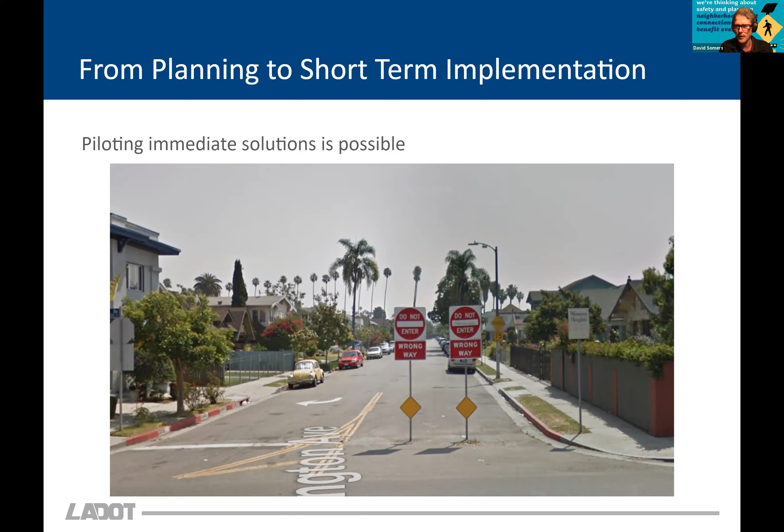Yeah, this is part of the feedback process. So if there are intersections that need specific attention, this is the time to define that, and that would help us enroll it into a future scope of work for funding, especially if it's specifically on a corridor we're evaluating that's on the neighborhood enhanced network. We understand there could be needs and challenges even at minor intersections, where you may see people speeding or not complying with the stop signs that are there. So there are opportunities for that, and I think that we can provide

Again, the program contact, yes. Thank you, Rubina, for providing the program contact so we could continue to take feedback there.

David, let's see. I also wanted to elevate that part of Michael's question related to how my neighbors and I can work with LADOT to advocate for improvements along, in this case, Whitworth. I think this question would potentially be relevant for any location, right? I just wanted to elevate that one, since it's like a second question raised as part of the first question.

Right, sorry, I missed that. I do see that in the chat here, and we did take note of that. So Whitworth is on the low stress corridor on the mid city on our maps, and I think we'll definitely want to have your contact, Michael, for future reference when we go into developing a deeper, more specific scope of work, and work with you and your neighbors. So please provide your contact, as Rubina indicated, at stressfreeconnections@lacity.org, because there will be future opportunities for us. This is just the first beginning phase of us taking on greater definition of the types of things we want to see on these corridors.

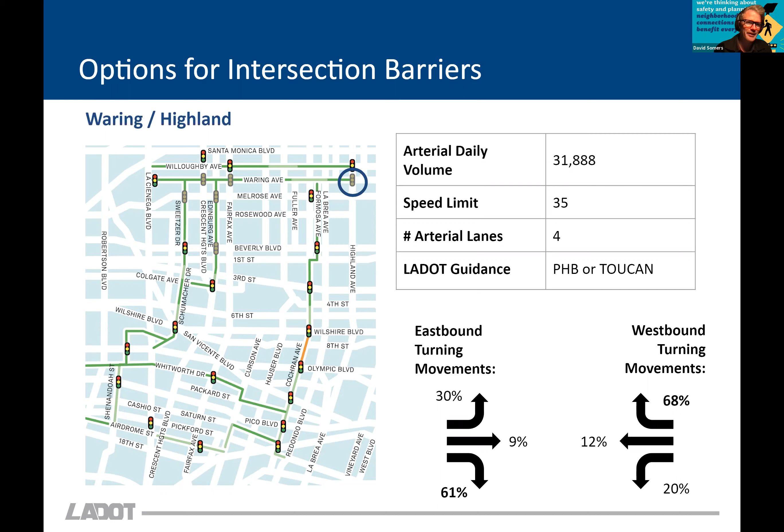Severin, would you administer the last poll? The question is: the city should prioritize transportation investments that address climate action, equity, and public health. Please indicate whether you strongly agree, neutral, disagree, or strongly disagree with that statement.

All right, looks like we have the answer—sharing the results now. It looks like we're in very strong agreement that the city should prioritize investments that address climate action, equity, and public health. That's good to know, that we have your support in making solid progress there.

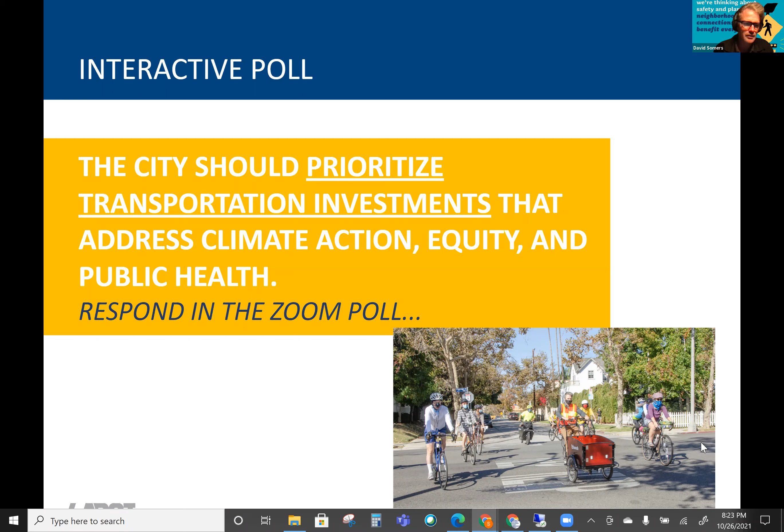I know Rubina has provided this in the chat, but just in case—on the next slide, if you can advance, Severin—our program email is stressfreeconnections@lacity.org, and there's a specific project webpage for the Mid-City Stress-Free Project where we can take more feedback. That page actually has an interactive portal, so a lot of the ideas discussed today about minor intersections that could see some level of treatment to address conditions there, you could provide through that interactive feature on our project page, which is another way we're collecting feedback.

So with that, I want to deeply thank you for taking the two hours this evening to get a grounding in the next phase of the Planning for Stress-Free Connections program. We're excited to hear the positive feedback and some of the concerns, and I think we can rise to the challenge on this specific program. We really appreciate your involvement, and thank you to those who participated in the network audit, which gave us a deeper understanding of the barriers that need to be addressed for a greater stress-free travel experience for biking and walking. With that, we can conclude the webinar, and I wish you all a great evening.